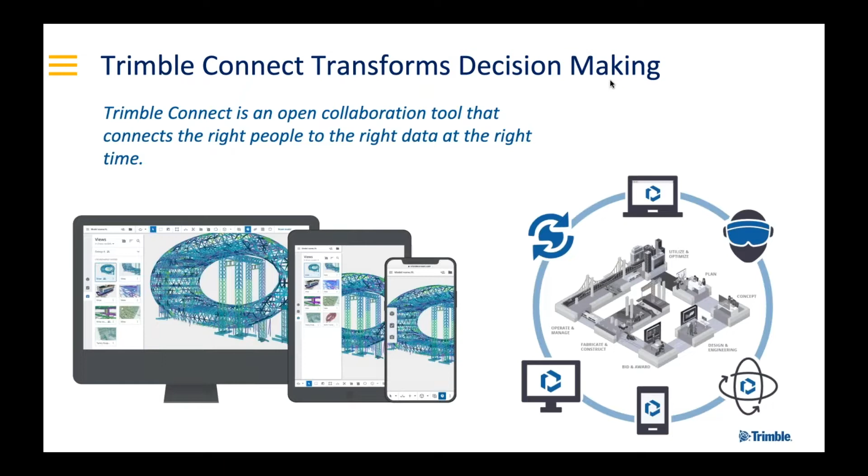So let's take a look at the application. We are in the main application window and are navigating into a project. Once you're in a project, there's a folder structure, not unlike what you see in Windows or your Mac Finder or any other file sharing application. You can navigate to any of these folders and see what files have been shared by team members.

One of the new features introduced recently is related to adding further information to these files. So in here, I can click on status, for example, which is a field that I added to my account. All of the projects now have this field, and I can use that to quickly see the status of a file, so whether it's in draft, for review, or accepted.

You set that up as part of your company administration. So those of you who are a company administrator will have access to this area in the application. When I click on drawing approval here, you will see the fields that I just looked at. I can add an option, for example, make that rejected. As soon as I publish that, all of the files and all of the projects that belong to my company will have access to that field, so I can choose that value. What that does is increase the discoverability of my files that have been shared in the project.

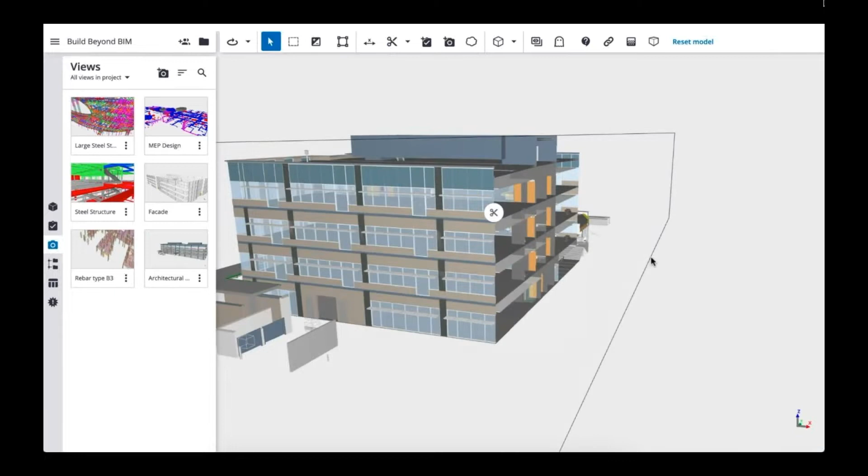If I wanted to look inside the building, this is a new feature that we added, the vertical clip plane. You can click on an element to select what location you want to create a section, and then look inside the building, and that will cut through the combination of models that have been activated in the 3D view. I can delete like so.

If someone needs to follow up on something in the design, I can add a cloud, and I can also create a to-do, and that to-do is a follow-up action that can be assigned to team members, and that capability can replace the spreadsheets that we often see used in project teams.

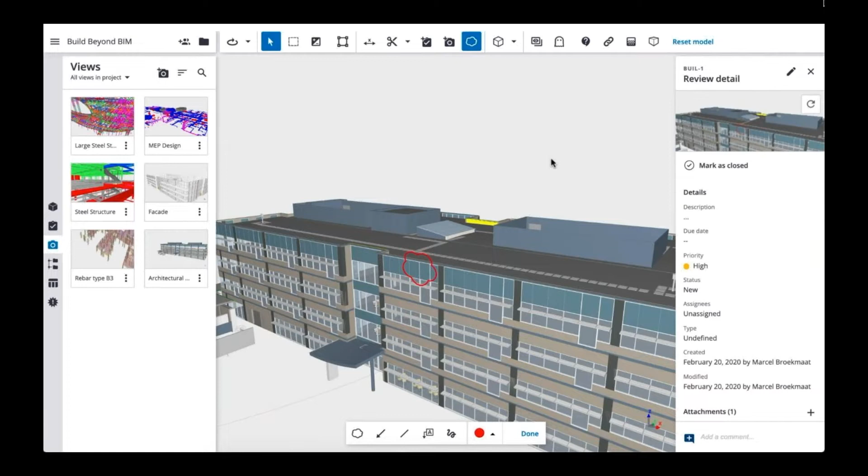So I'll assign high priority to this one, hit save, and once that is saved, it will create the view for this particular item as well, and the ability to then jump to that specific to-do.

So here we see the overview of the to-dos, and when I select it, you will see the description of that item. And there you see I created a previous one with exactly the same view actually in a previous session.

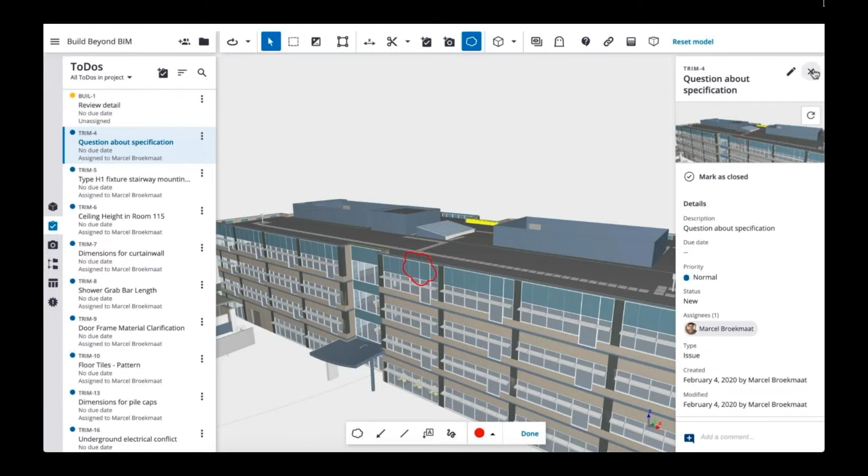Now, before we do that, let's activate some additional models. I'm going to look inside the project, like the folder navigation that we looked at earlier, and I can include more than just the current model. So I will activate the MEP design in this too.

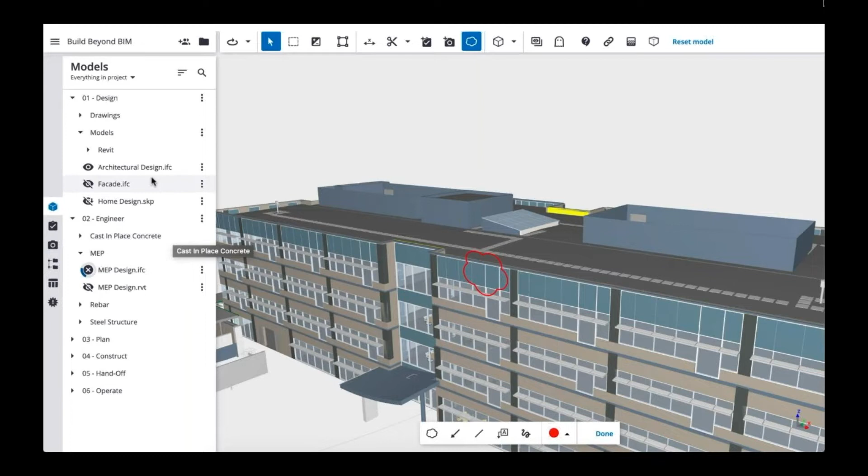That shows how you can combine multiple model sources in the same view. It doesn't matter what version of Revit you're using, you can mix and match versions of those files in the same view in Connect, and you can also combine that with SketchUp and IFC files and any other sources that you may have for your project.

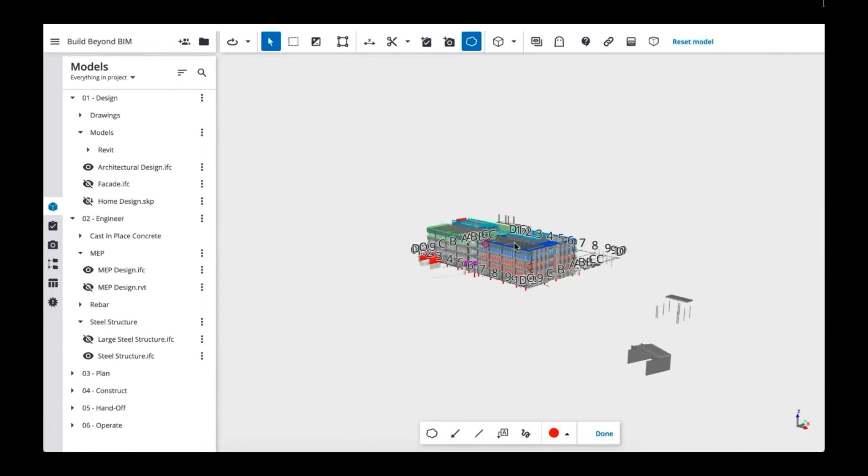There we go. So this is the full structural steel at fabrication level of detail, including also the MEP model.

So back in the main application, we can see those to-dos as well. I've currently isolated priority 1 or critical, can go to the high priority as well, or search for users and groups again. And this is where you can see the snapshot that was just created for that issue.

When I click on it, it will open up the view, so that closes the loop.

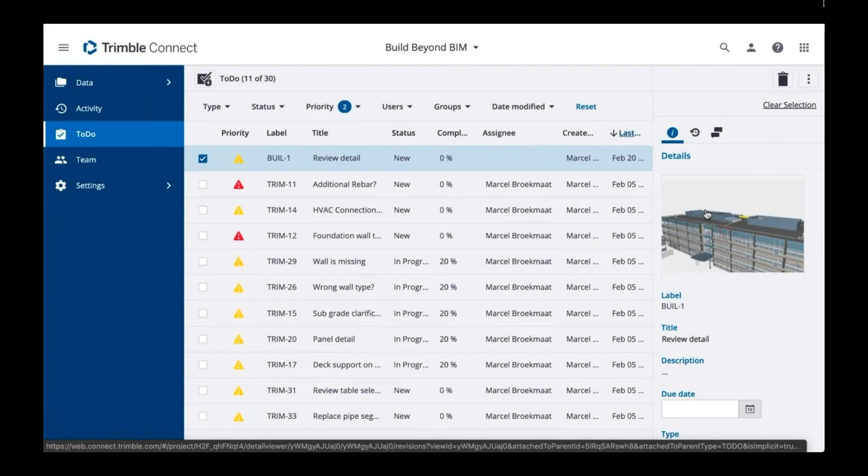Now that works on a mobile application as well. So this is my iPhone, and that's the MEP model that we just loaded in the browser as well, but now isolated without the architectural and structural.

And the nice thing is that the information for all of these elements is available in your mobile application too, so you carry all of that data in your pocket.

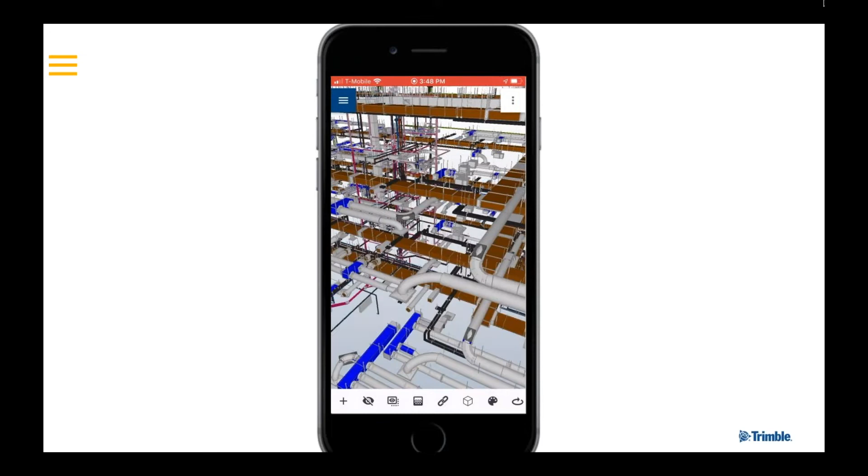Let's navigate to the file browser in here as well. So this is all the data that we have on our project. I'll open up the steel structure next and view that in the 3D viewer on mobile.

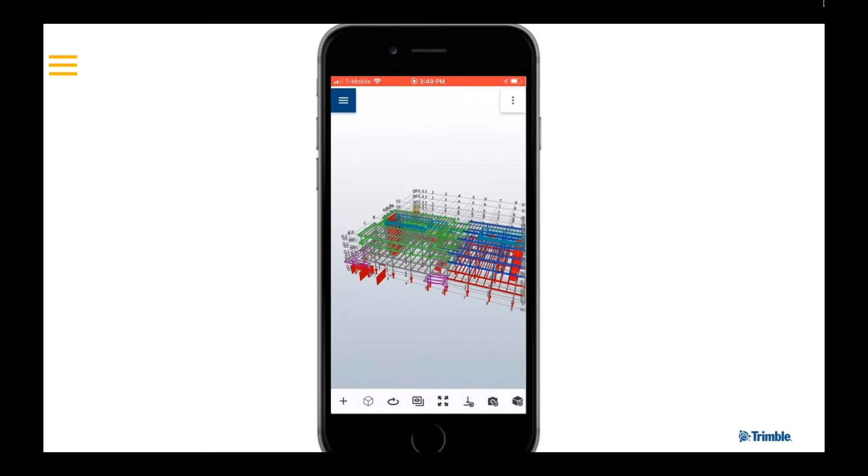And a feature that is now available to all Business Premium subscribers as well is status sharing. So when you activate that on your project, you have the ability to pick elements in your project and specify for a certain condition whether it's been started, whether it's been committed, or when it's completed. And it will record the time at which it reaches that status.

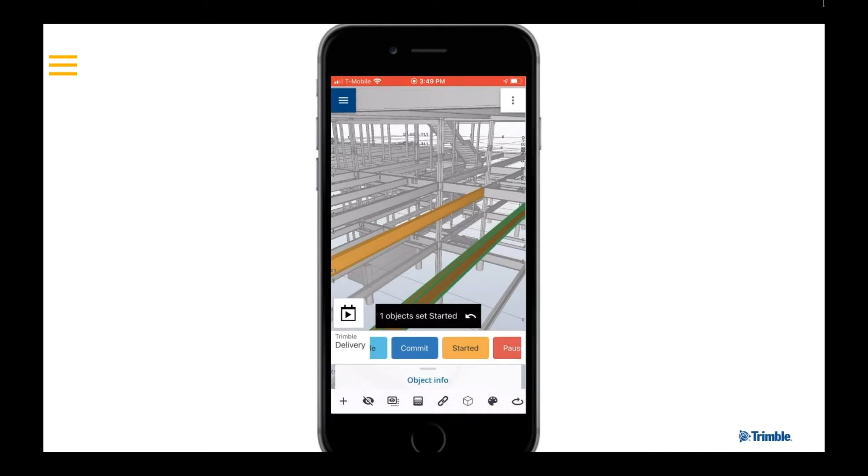So that means that at the end of your project, you can play back exactly when 3D elements change status.

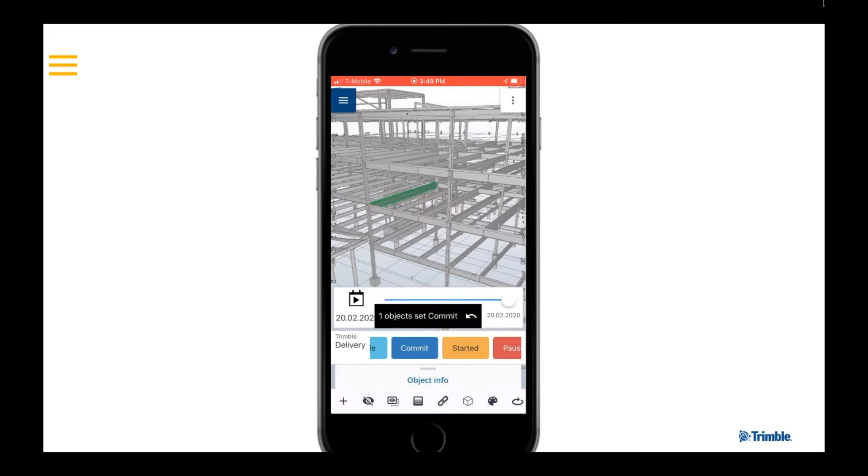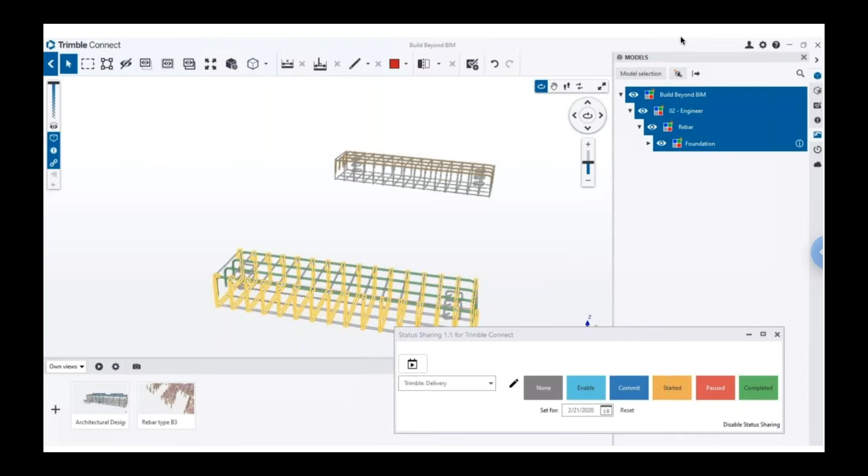Great, thanks, Marcel. So as you were going through that introduction, I did notice some new buttons on the left-hand side of the 3D viewer application. Is this the new workflow extension functionality? Those are the buttons, so that's what I was referring to. It didn't cover those yet. We did look at the properties of selected elements, but we can take a quick look at those items now.

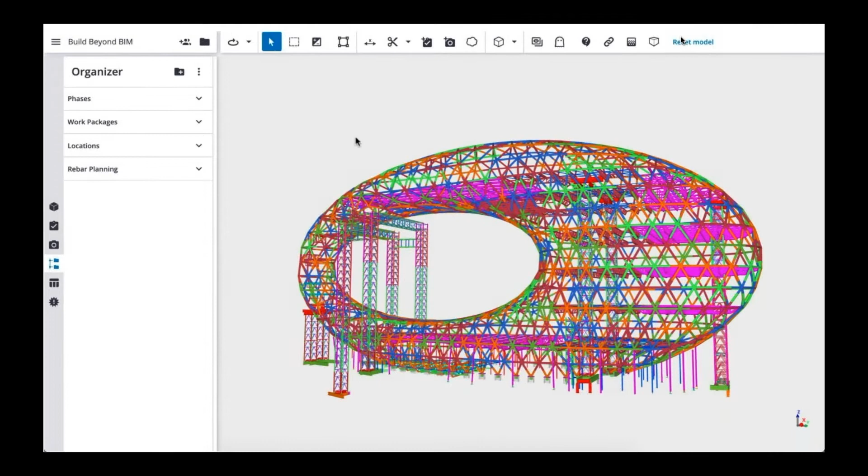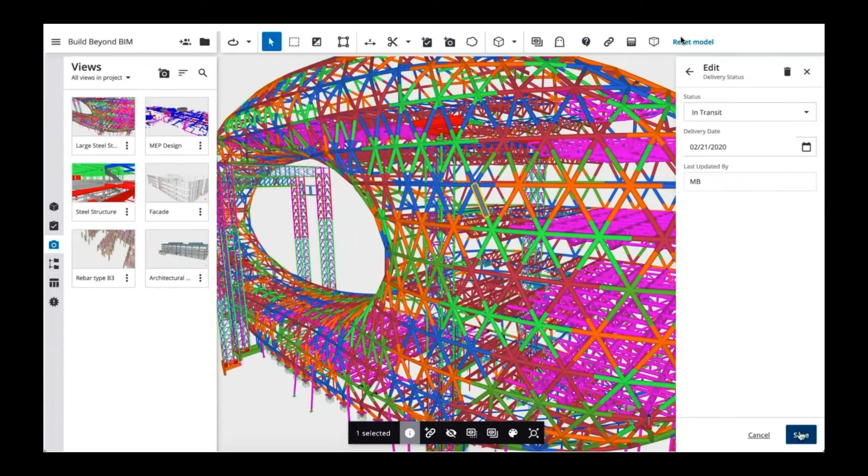We'll bring back the application window, and I'm loading a view for this steel model here. I'm opening the properties of this specific element, and these are properties that have come from, in this case, Tekla Structures. What I can do now with the workflow extensions is add my own custom properties. So I've got some for schedule planning, I've created some for materials management, let's assign delivery status. And these properties now become part of my project in Connect. I'm setting the delivery date, and I updated this last. So the next time I select that element, I will also have delivery status.

The organizer is the other part of the workflow extensions on the left-hand side. You can use it to create any kind of breakdown structures, as we see here.

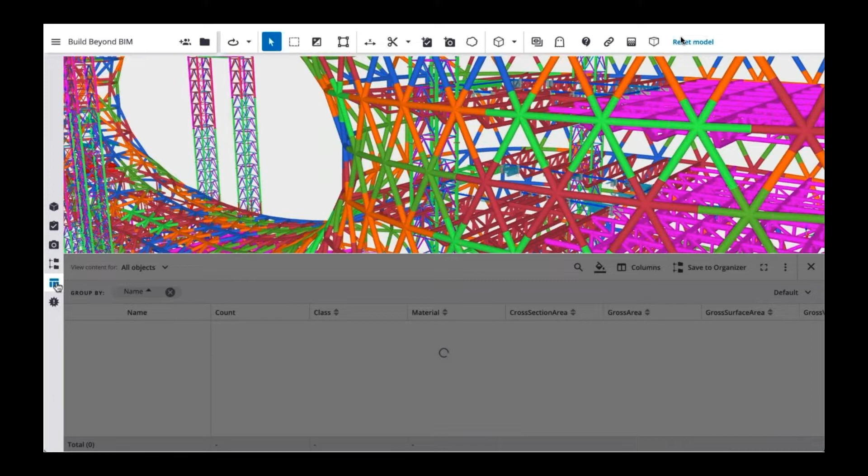Then the third piece, part of the workflow extensions, is what I activate here. That's the content browser. This will take a moment, but what we're doing here is loading all of the associated data, all of the attributes for all of the model elements that you see in this view. Once that is loaded into that table, you have a pivot table that creates the ability to interact with your BIM content from a data point of view.

So I can select an item in here. Say I click that deck plate, I want to see that in 3D. It will highlight those elements in the 3D space. And I can isolate, and activate everything else again.

Great. So you mentioned organizer breakdown structures. Could you maybe give some examples of the breakdown structures and how they're used? Yeah, sure, so I've got a couple of examples for that.

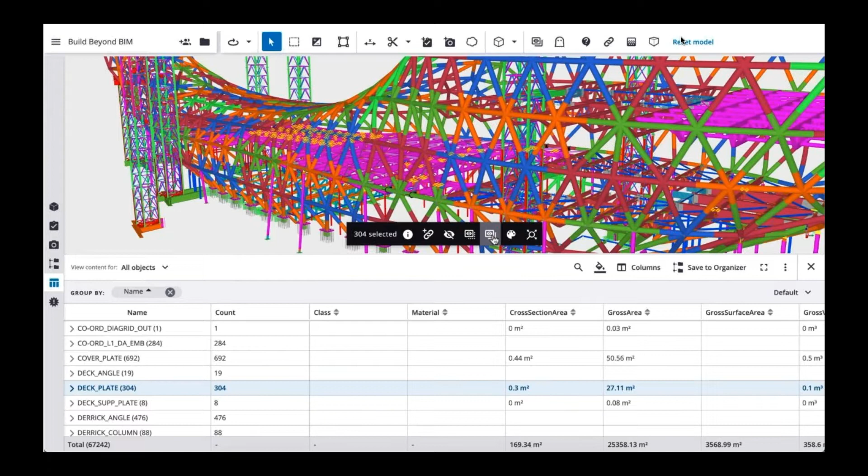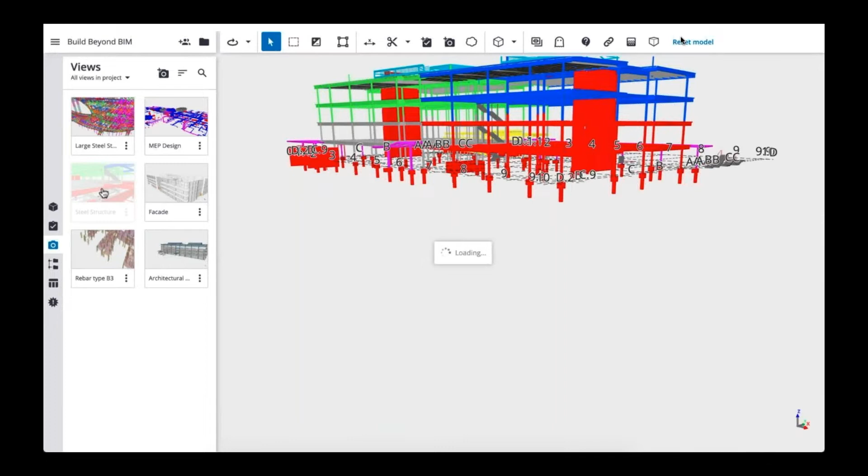Let's start with one that uses the steel structure model that we looked at earlier. So I'm clicking on that view to load that in the application. And then once that is up, we will use the organizer to talk about the phases that have been defined by the steel fabricator, together of course with the GC. As you can see, fabrication level of detail, every bolt, every member is included in this model, and I can interact with it in the browser.

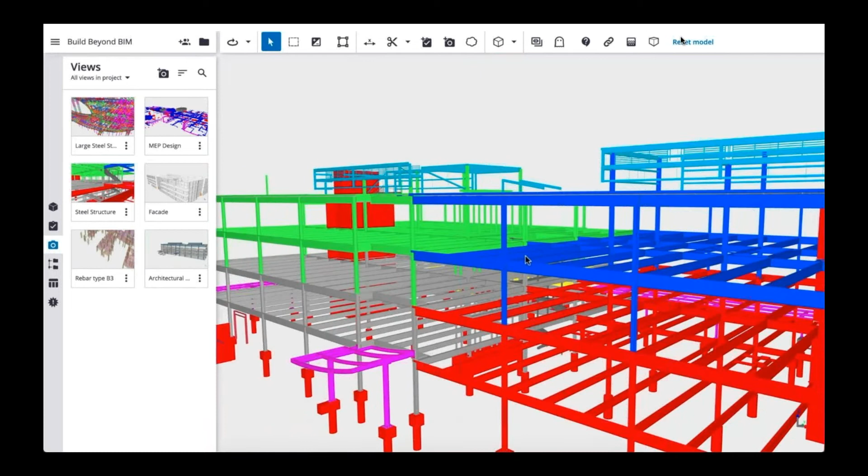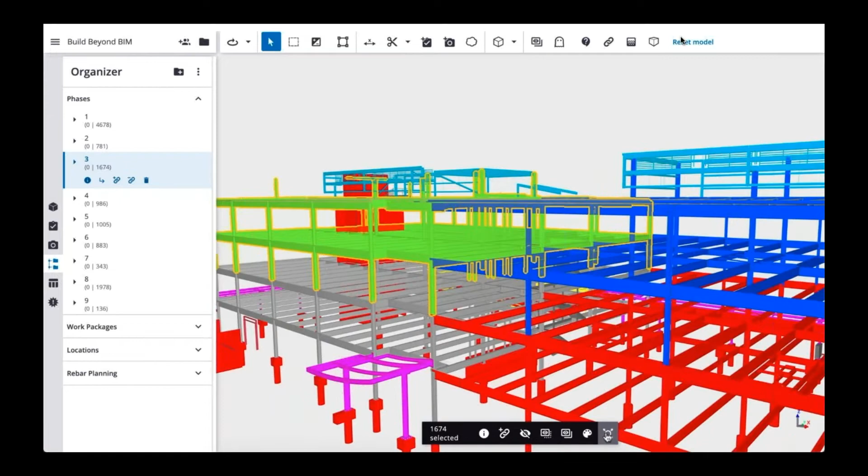Now I can open the organizer panel here, and I'll use the phases here. Each of these nodes, each of these groups, have a number right next to them. That number indicates the number of elements that has been associated with that phase. So 781 for phase 2, 1674 for phase 3. And now when I discuss my plan for steel erection with subcontractors and others involved, I can just use the organizer, isolate those elements that belong to phase 3, and have a much more efficient conversation about what my plan phasing is.

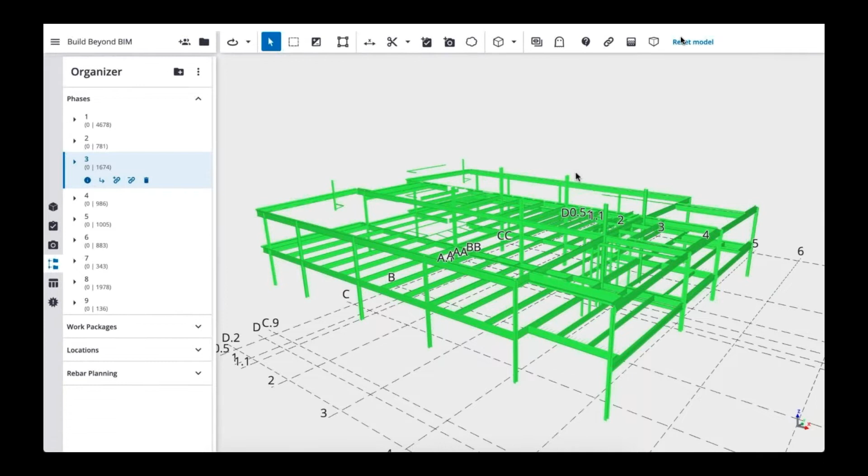Another example uses this architectural model that was created in Revit, and we brought it into Connect through the publisher. We'll give that a moment to load.

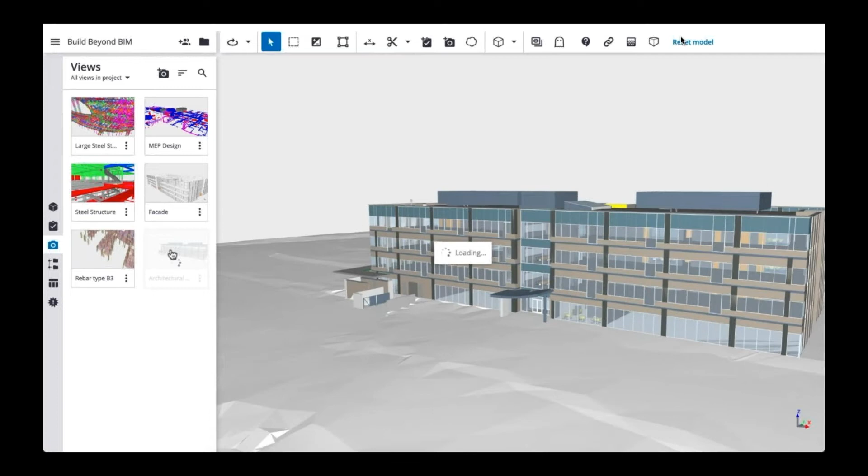And we'll use that to visualize work packages. So another use case for organizer would be—let's position that right—another use case would be to communicate the contents of work packages, or bid packages, or budgets if you will. You can easily visualize that too by linking 3D elements to these codes. So each of these codes, each of these nodes, now represent work packages using Uniformat coding in this case.

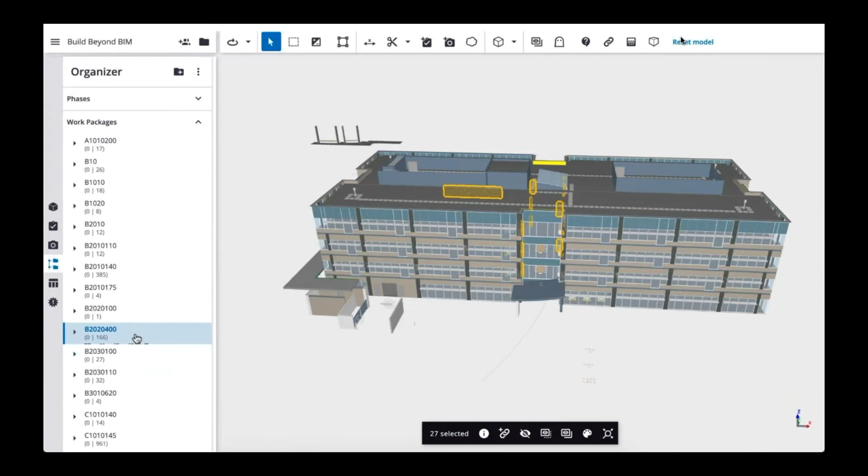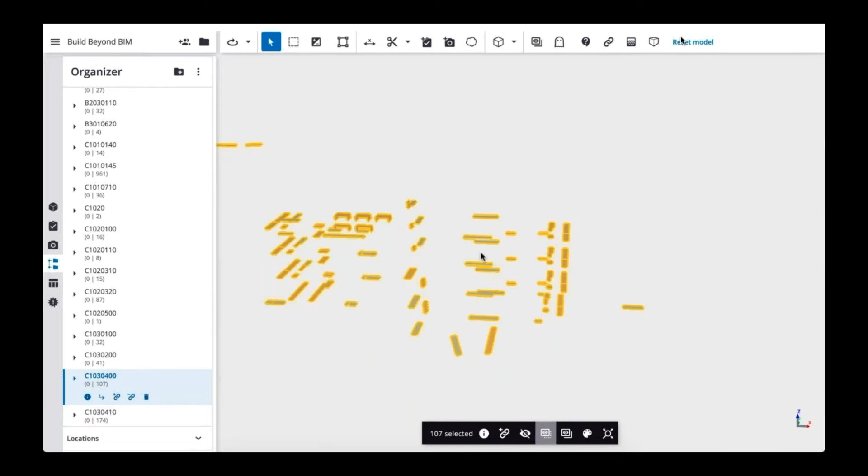And just by clicking on these nodes, I can now visualize what is in scope for those groups. So see, 1030-400 has these elements. I can see where they are in the project, and if I wanted to, I can isolate them in the view as well by clicking that button. And again, facilitating communication, if I wanted to see the additional properties, I just click on the I button to get that data.

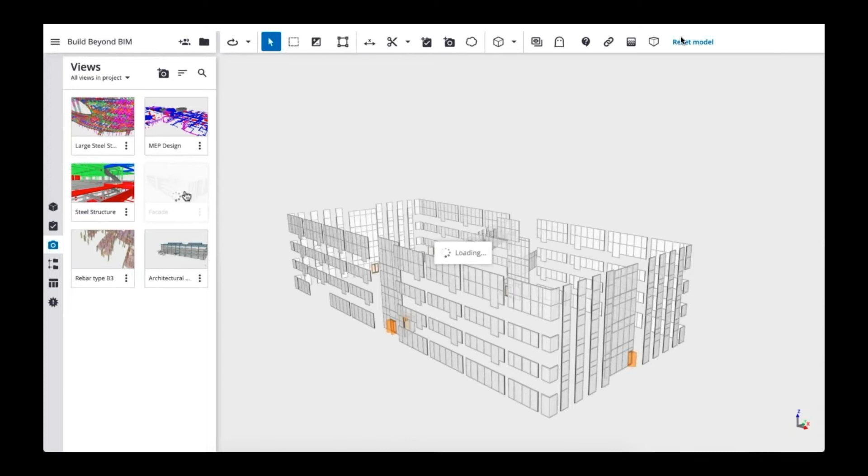I've got one more example that uses a fabrication model for the facade of the building that Matt and I are in here in Westminster. A very detailed model of all of the windows and curtain walls. And what we've done there is take advantage of the labels assigned to those windows and curtain walls.

To indicate the marks and the phasing for the installation of that, we went back to organizer and created a breakdown structure for locations. In this case, that's a multi-level hierarchy, so it's not limited to just one level of grouping. You can nest groups too. So here we're looking at all of the Mark 3 on floor 2. I could select the other nodes as well and get that highlighted.

Again, if you need to give instructions on when elements need to be delivered, or provide information about quantities or discuss space that is needed, this is probably a much better way than doing that based on spreadsheets and 2D drawings that are marked up.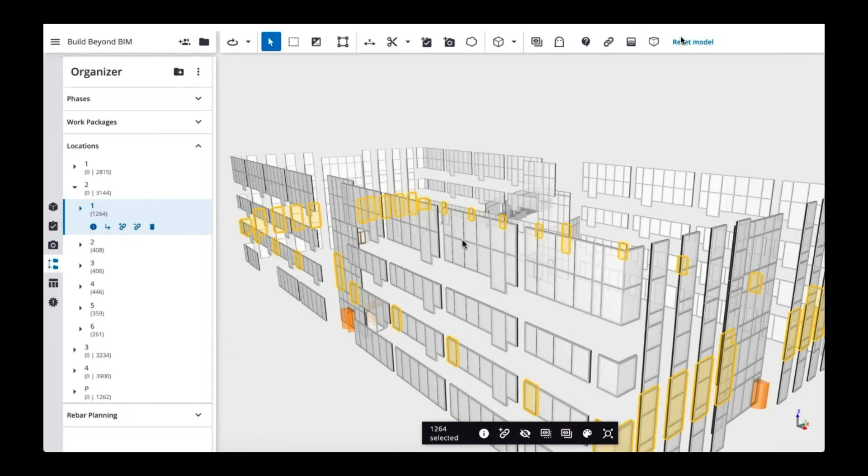I hope that answered your question about breakdowns. Yeah, absolutely. Seems like a pretty cool tool there.

So you mentioned the content browser as well. Could you maybe demonstrate what that is used for? Yes, sure, I've got a couple of examples for that as well. Let's go back into the model, and we'll start with a SketchUp model actually.

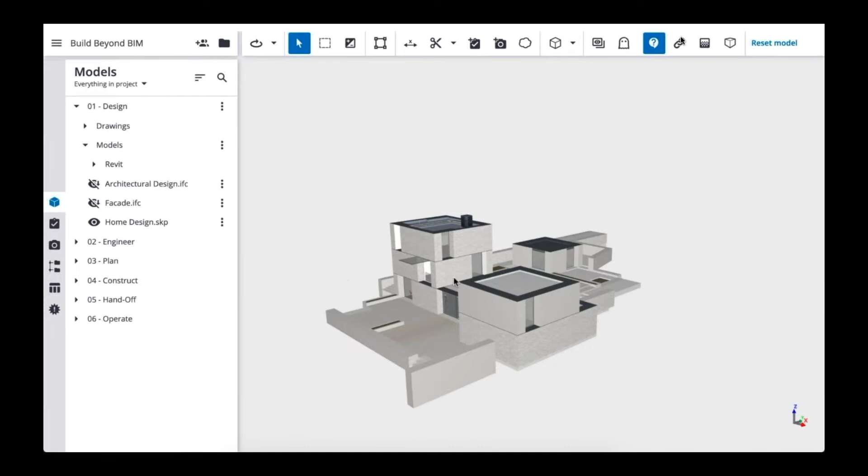While that is opening up, that SketchUp model was created with components and with what's called dynamic attributes in SketchUp. When we select one of those elements here, let's pick one over here, and click the I button, you can see what those dynamic attributes look like. So those came from SketchUp.

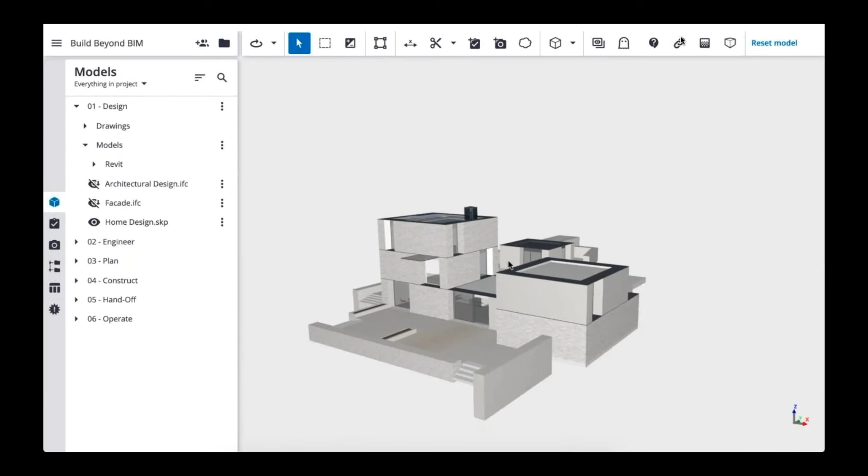Now, the nice thing is if those dynamic attributes are included in the SketchUp model, that means you can feed them into a table. And that's what the content browser is about. We saw that quickly earlier with the steel model. Now it shows the content that has been included in the SketchUp model, so these are names of components.

And when I see one that I would like to get a closer look at, I select Show in 3D, and it takes me directly to that element, and shows me where that is in the project.

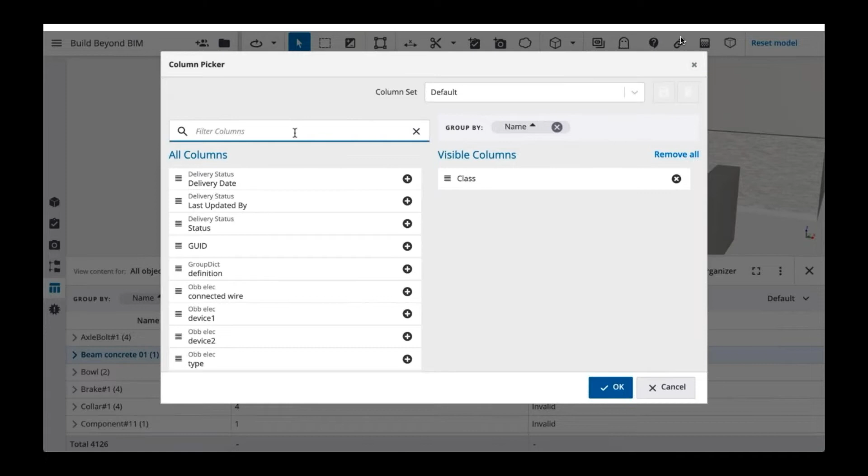And I can customize the columns that I want to see. I know that one of the dynamic attributes is called cmaterial, and I can add that to the collection of visible elements and decide how I want to use that for grouping. When I click OK, it shows me a reorganized pivot table, and now I could, for example, find everything that has material concrete assigned to it.

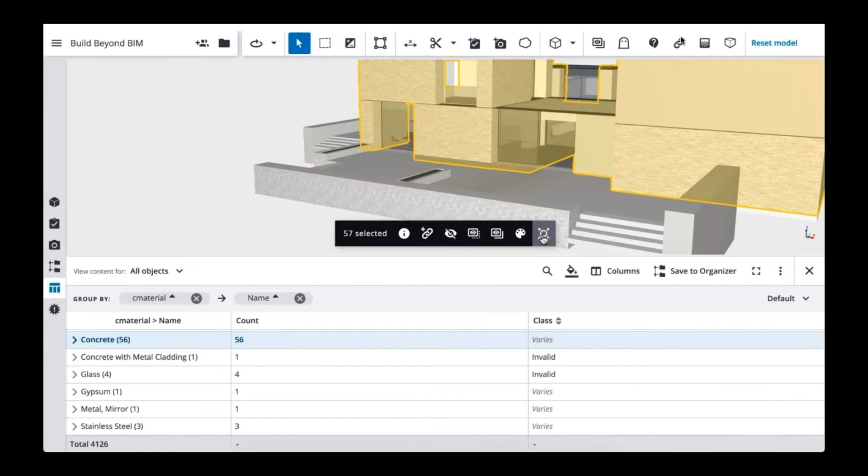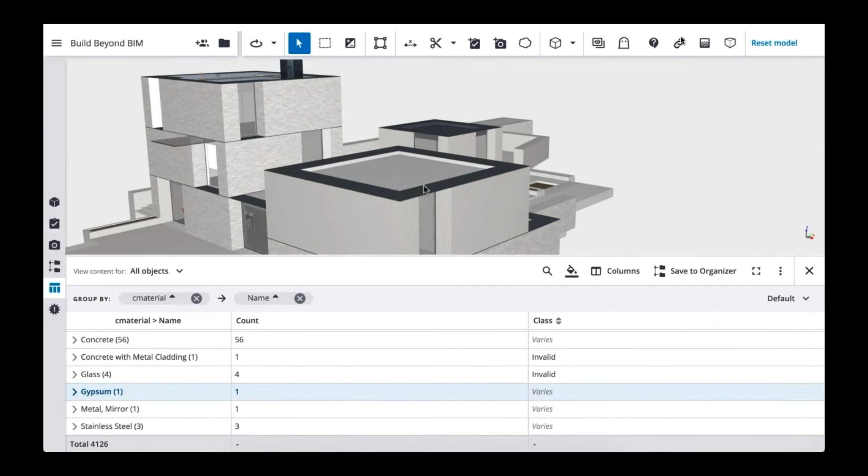So it now has 57 elements selected, including the one we selected earlier, and all of the individual components are listed below it. If they had unique names, I could select those individually too. There's one gypsum item, and that's located there. So that's how much more value could already be delivered through the creation of components in SketchUp as well.

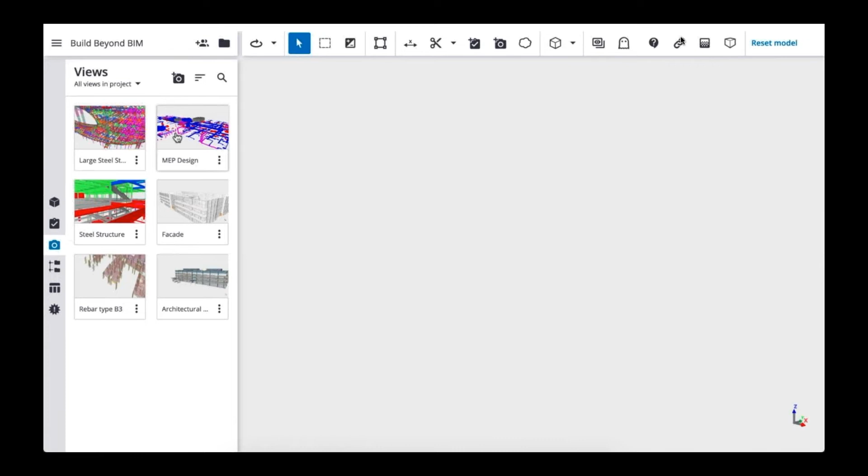Another example uses... I'm going to activate another model, I'll close this one. So we'll use a view in this case, and I'm going to open up the MEP design model here. It was created in Revit, but could have been created in SysQue for Revit as well, or Stabicad, or any of the other tools available for detailed MEP modeling.

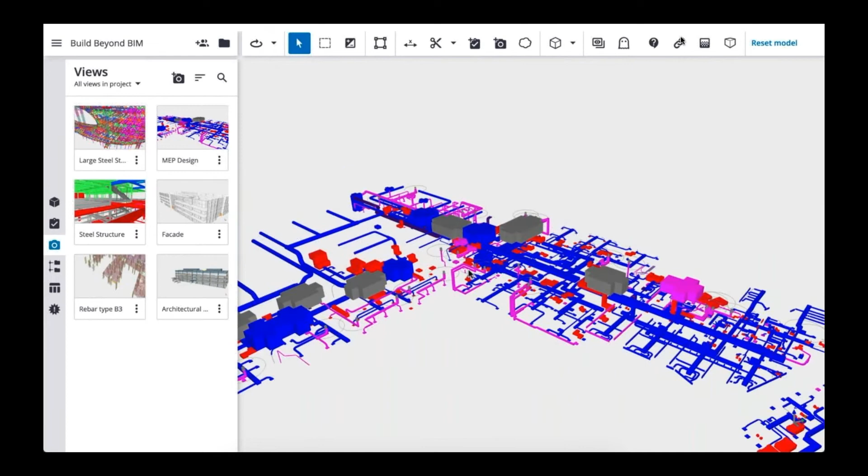MEP entities, of course, have a ton of metadata associated with them, and I can take advantage of that too. See that the initial grouping here shows some invalid names because those properties may not be available, but I can predefine some names as well. I've got one for Revit MEP, and now I'm grouping by family name and then by type name, which allows me to interrogate the model based on that grouping.

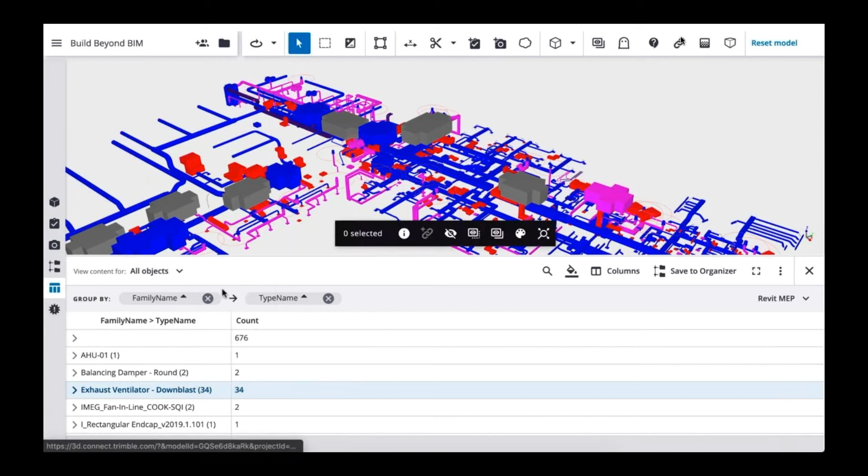This exhaust ventilator, you can find that by selecting it in 3D. In this case, there's one family type included here. Let's find another one. This diffuser has 2 types, and there are 3 of the J type. It may be difficult to see, but now I zoom into those, and there they are.

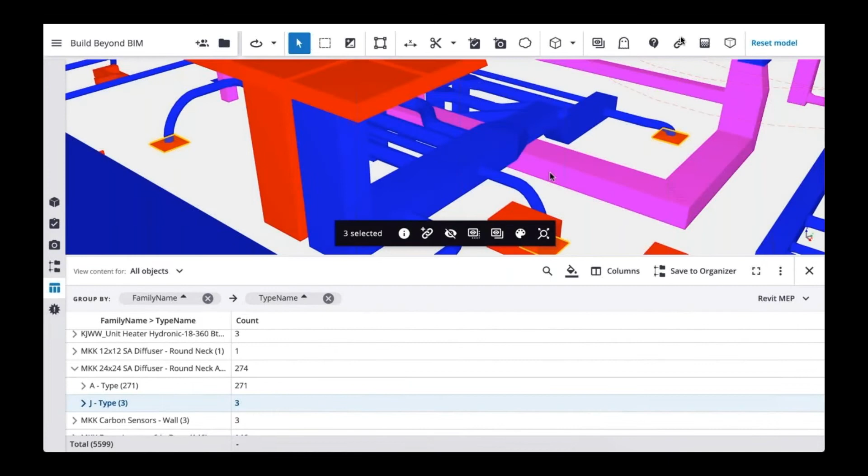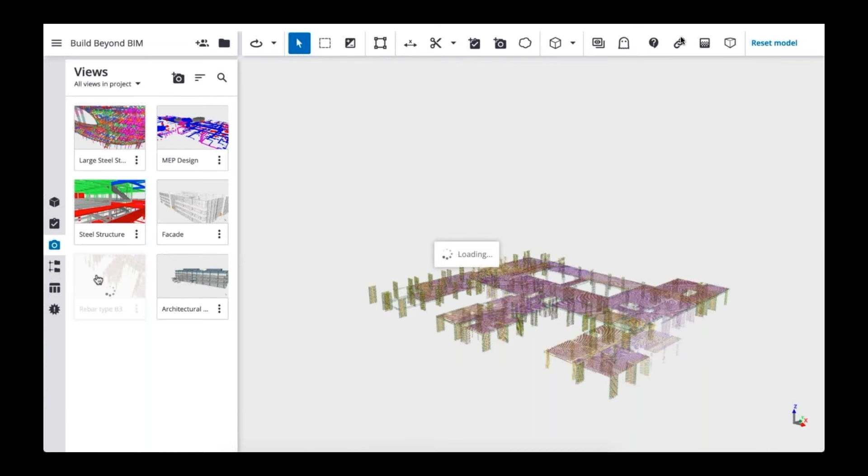So one more example. We're going to load another view, and for that I'm going to open a detailed rebar model. The nice thing about views is that any selected elements will be retained as well. In this case, I know that one piece of rebar was selected for this view. So if I wanted to point out to a team member to pay attention to this, I can keep that selected when I define the view.

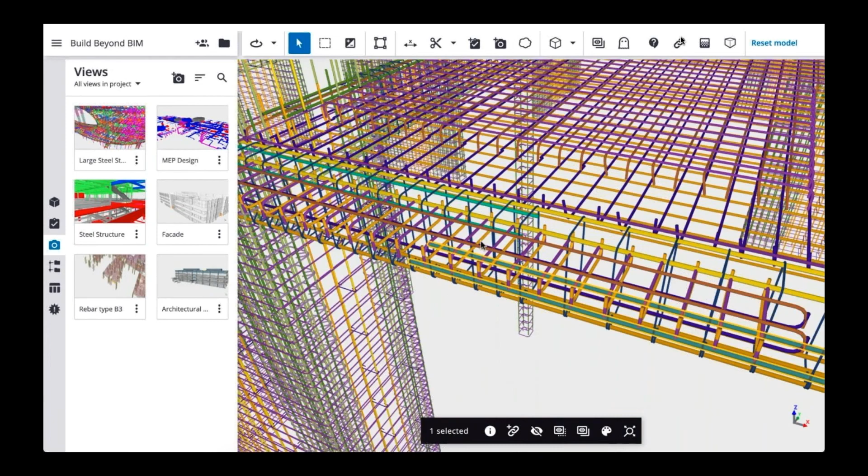You'll appreciate the level of detail, the constructible level of detail that we're able to present in this 3D viewer. Every individual piece of rebar is loaded here, so a ton of geometry, and with the attributes associated with that, we can then use the content browser to interact with it.

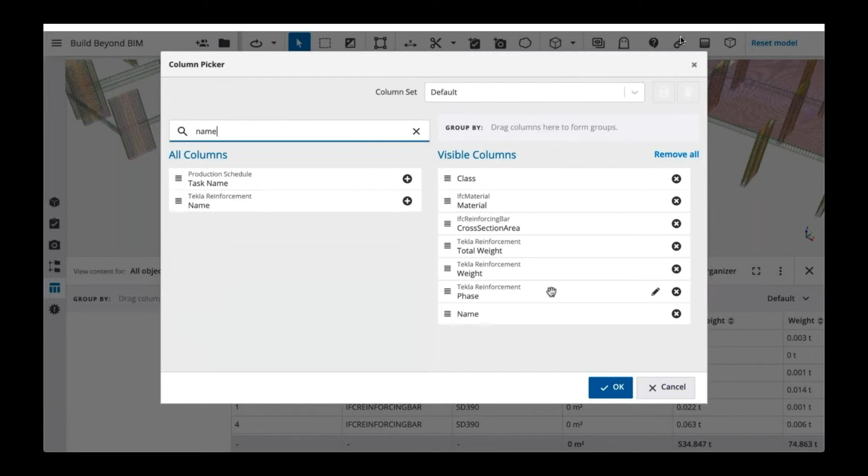So we're missing currently the initial or main grouping criteria. Let's find the name column, and we'll add that to our set of visible columns, and I'm actually going to use that for grouping as well. There we go. Now the names for the rebar coming from Tekla actually indicate the type mark, and I can quickly find out where all 804 instances of that B1 type are located.

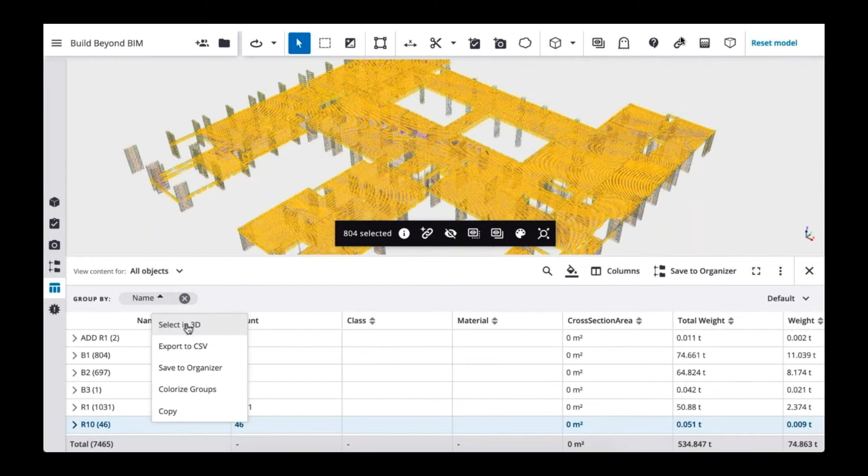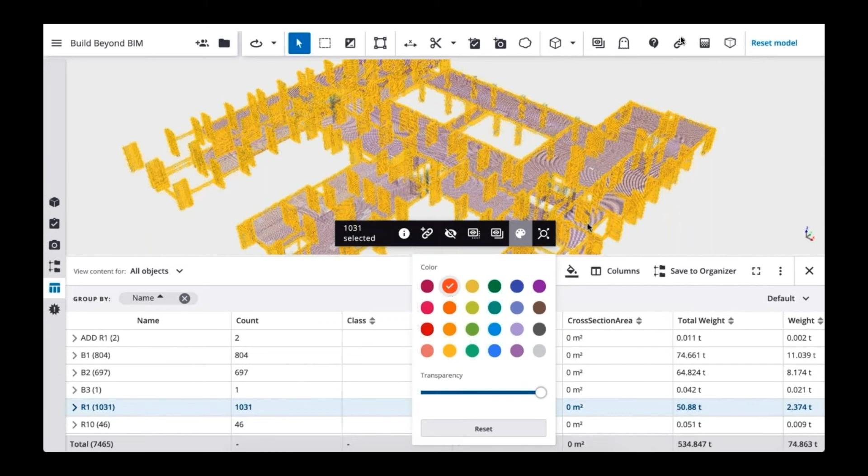It's a quick way to find out not just where they are, but as you can see, there's the total weight and other properties as well. If I wanted to highlight specific items, I can override the color, and then I could save a view that I can then share with other team members, perhaps for use in the mobile application.

A nice feature we've built in is to make these groups persistent. Do that by saving them to Organizer. So I'm going back to Organizer, and I'll refresh this panel. Once that completes loading, you'll see a new group called Name, which is exactly the group we just defined in Organizer. When I click these groups, you see that I've got them highlighted because they've been selected.

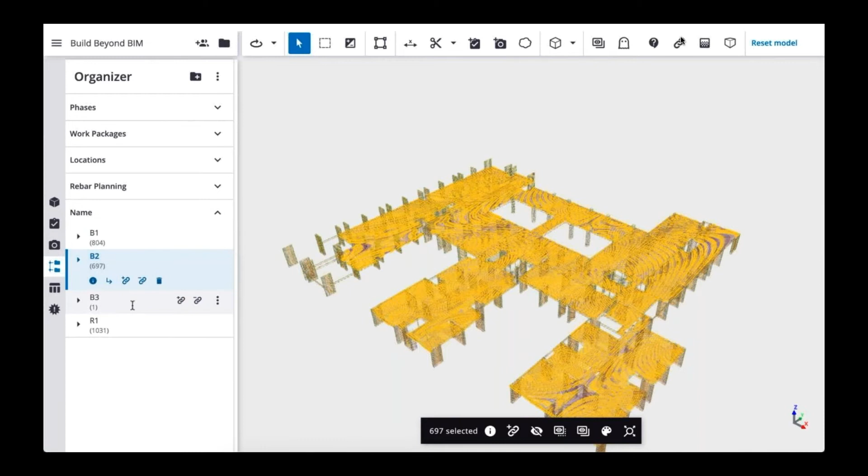You can still make changes, so individual elements can be added or removed from an Organizer too. Let's go back to the content browser once more.

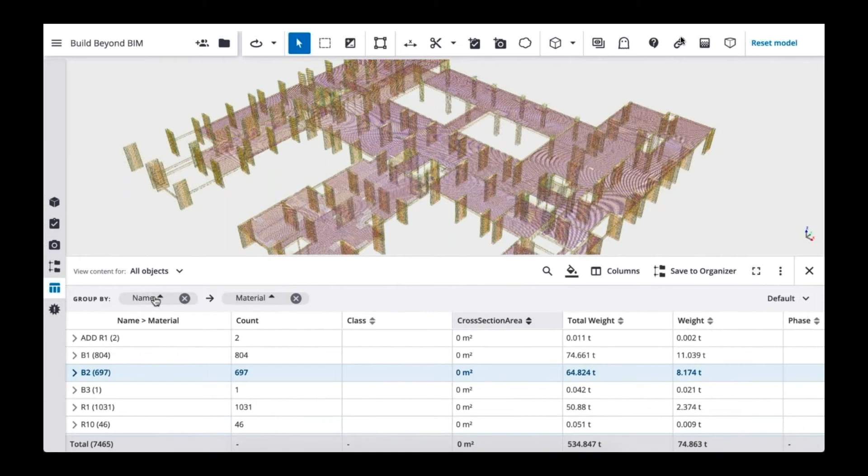So drag and drop columns into the header. Moving them around changes the hierarchy. I can change name to become the second level of the hierarchy of the grouping. That then allows me to take a look at the materials first and see in 3D where that SR235 material is located.

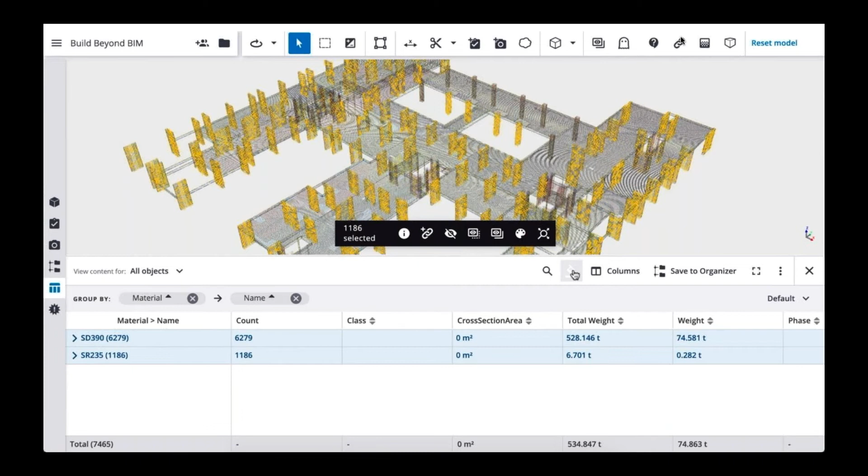And if I wanted, I can still produce a spreadsheet as well. We're not fans of spreadsheets, but you can still produce them. The last piece I want to show is the ability to color code. Your grouping, in this case, has 2 levels of groups, which may not be ideal, but you can automatically assign a color to each of the groups and then communicate each of those groups based on that color code to team members and stakeholders.

Great. Thanks, Marcel. That's a great overview of the content browser.

As you were going through those demonstrations, I noticed that all of the data from the BIM authoring tool, whether that be Tekla, SketchUp, Revit, or some other authoring tool, seems to be included. What if you need to include data that was not included in the BIM? Yeah, that does happen. In many cases we've seen using Connect and also working with other applications, you would have to go back to the BIM authoring application to add that data. Especially when working in the field or for project management, that may not always be feasible. You don't always have access to the original BIM file, or you may not have that capability on site.

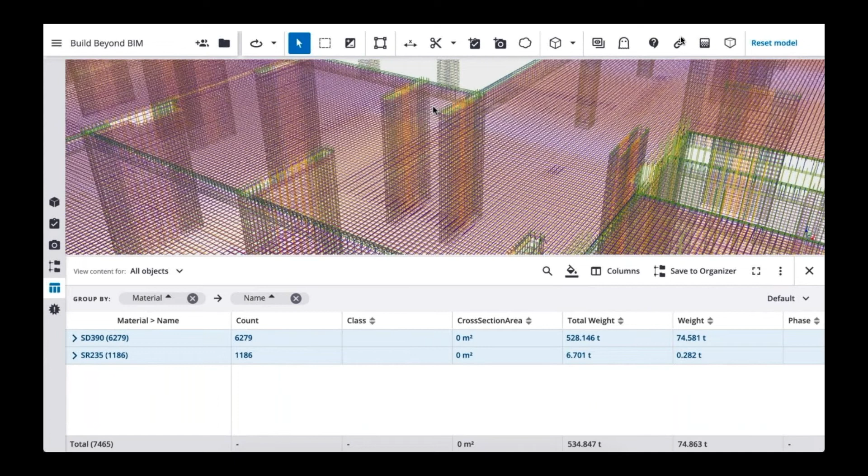So what we've done is added the ability—I'll turn off these colors for a moment—we've added the ability to add your own custom properties. Let me demonstrate that. I'm going to select the organizer, and from there I can open up property set libraries. That opens up a separate UI, the property set manager, which provides functionality where you can basically mimic your spreadsheets. All of the rows or columns in spreadsheets can be translated into these property sets.

I've got 2 examples here, production schedule, and as I click through these values, you can see how they are defined. We can create a new library as well, so let's create one from scratch—the quality assurance. Within a library, I can then add a new property set.

I'm going to call this QA check 1, and add a property. For each property, let's call this inspection A, I can specify what type of property that needs to be. In this case, I want to make that a drop-down choice—either approved or rejected. That means that when I enter the value, I can choose from those 2 options. And I also want to add a note.

There we go. I can click publish. That makes that property set, that library, available for the entire project, so everyone who uses this data set, who's active in the project, can use it.

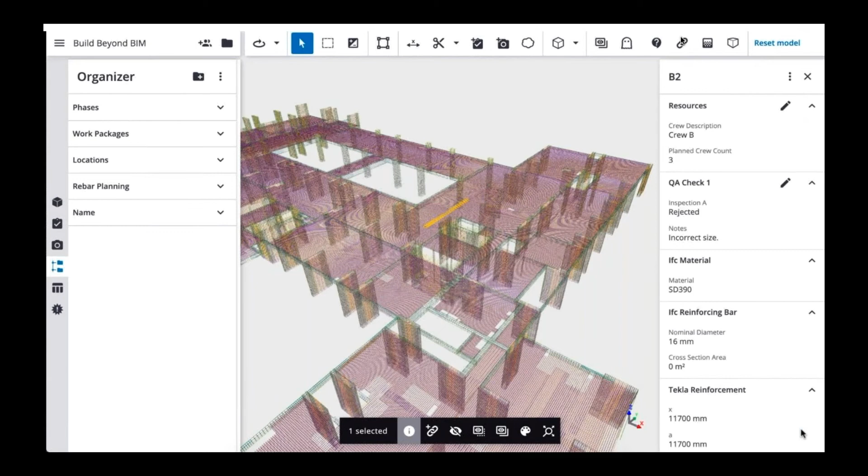I can do the same thing when I work with these organizer nodes. Perhaps I want a property or a property set to apply to a large group of elements. In this case, we already have resources assigned to that B1 phase, but maybe I want to assign production schedule to that too, so I can bring in schedule data for that group of 804 elements.

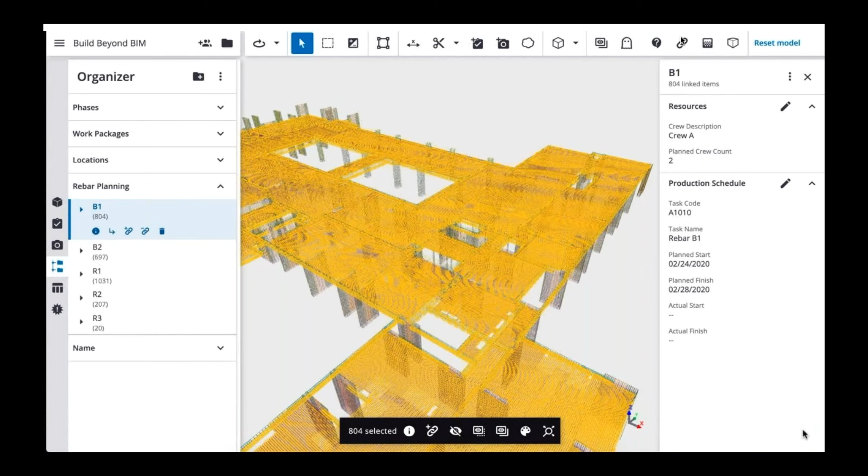Task name, make that rebar B1, and pick a planned date or copy a planned date, then hit save. From that moment on, this group has these properties, and now I can start to interact with that and see the actual schedule data too.

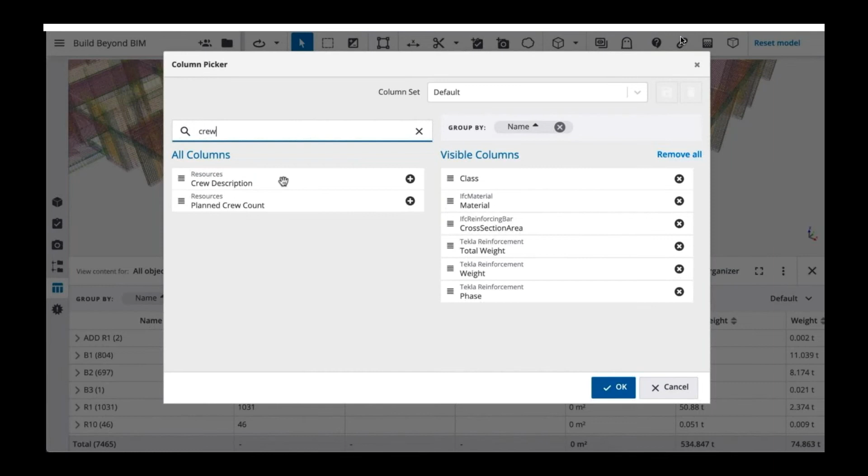Now, all of that data is available in the content browser too. We just saw the crew assignment. I can bring the crew description as well as planned crew count into the content browser, maybe group by crew description. And then I can take advantage of the fact that I enriched that data set. So now I see crew A, 804 entities, crew B, 697 entities.

And if I need to explain to crew A or crew B what they're responsible for, the only thing I have to do is select that group and highlight it in 3D.

So that's what we mean by building beyond the creation of BIM. It is the use of BIM by further enriching that data set using the workflow extensions. All of these workflow extensions we're demonstrating here are open for integration too. So if you wanted to feed, say, schedule data into that organizer property set or into any of those values, that is possible so you don't have to fill that out manually, and it opens up all kinds of integration opportunities.

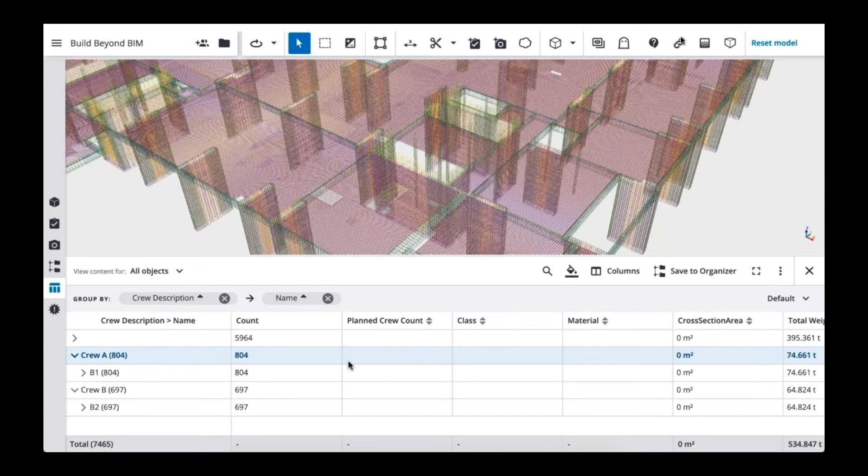First question: we mentioned that Trimble Connect is an open tool. Could you explain what we mean by that? We offer the ability for integrators to develop on top of Connect through APIs. We make the APIs available for external as well as internal people.

It's open for all kinds of file formats, so regardless of the source of your BIM, you can bring that data into the Connect environment and build further on that. We support all of the major BIM formats.

This next question is related to the previous one. Could you name some programs that have been successfully integrated with Trimble Connect? I'll use a couple of internal ones. Tekla Structures 2020 has an awesome integration with Connect, where you'll be able to release versions of your Tekla modeling to Connect and have viewing by all recipients of the model in the Connect environment.